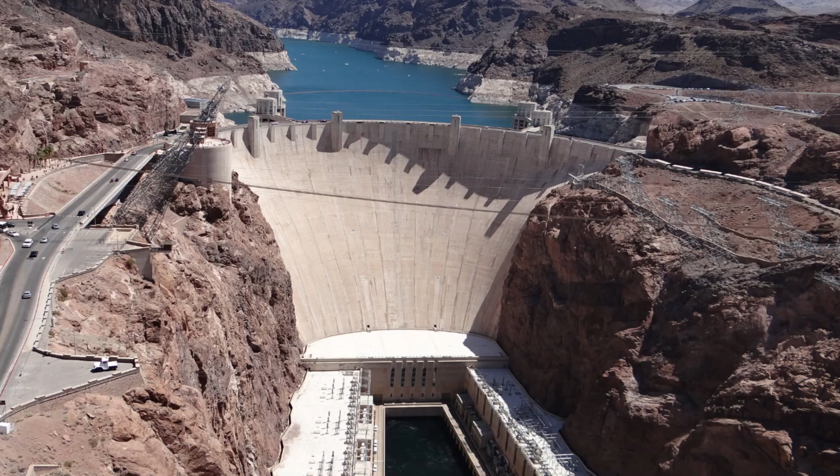Are you considering studying civil engineering? What is civil engineering? What kind of courses could you expect to take? What are the different subfields of civil engineering? What type of careers might you expect to go into? All that and more in this video.

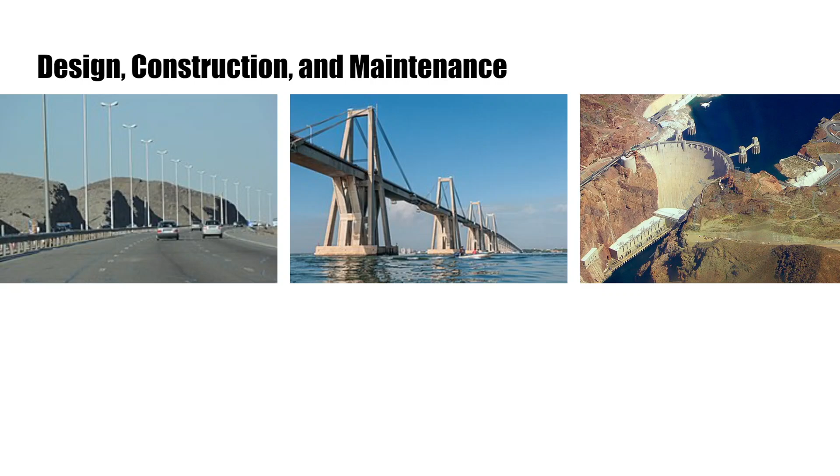Civil engineering is an engineering field focused on the design, construction, and maintenance of the physical and naturally built environment. This field covers a broad scope of projects and systems such as roads, bridges, dams, airports, sewage systems, and buildings. Civil engineering can be broadly broken up into four different concentrations.

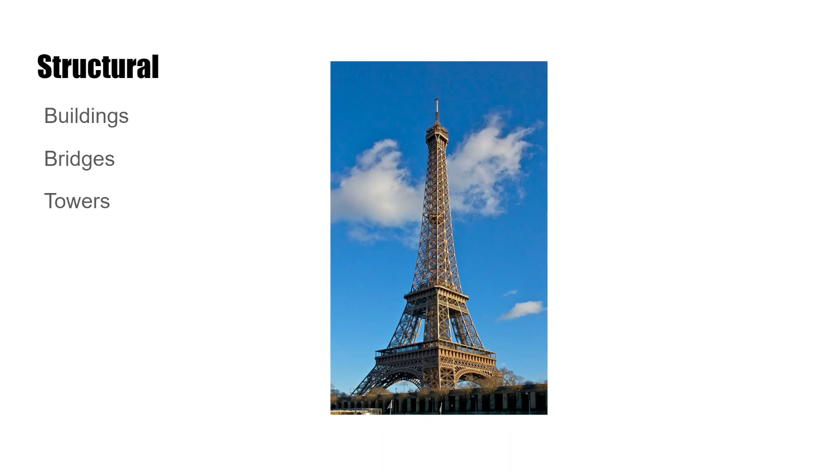Structural engineers are concerned with the design and analysis of load-bearing structures such as buildings, bridges, and towers. This field ensures that structures can withstand various forces and stresses including gravity, wind, earthquakes, and human use. They use materials efficiently and adhere to safety standards to provide stability and durability.

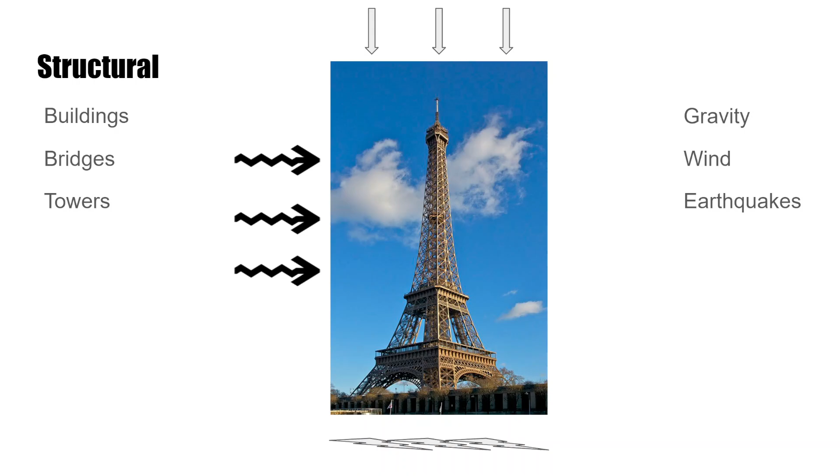They employ advanced mathematical and computational tools to model and analyze structural behavior, ensuring that designs are safe, functional, and economical.

Transportation engineers focus on planning, designing, and managing transportation systems, including roads, railways, airports, and ports. This field aims to improve the efficiency, safety, and sustainability of transport networks, addressing challenges such as traffic congestion, public

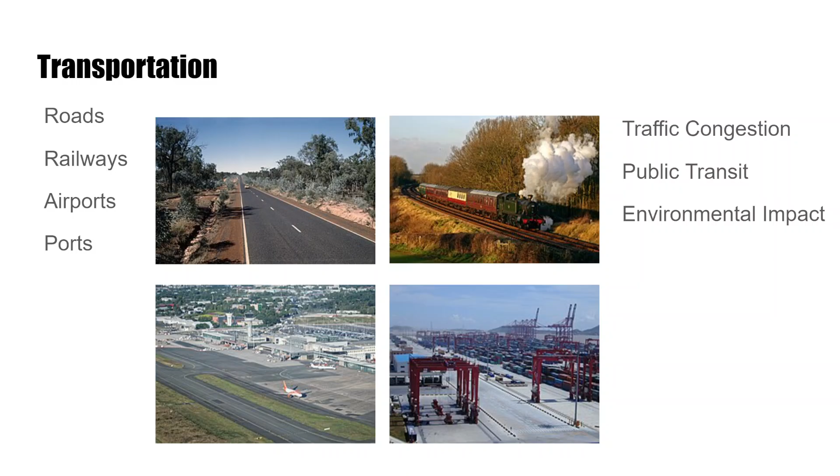transit, and environmental impact. Transportation engineers develop and implement strategies to enhance mobility, reduce travel times, and promote sustainable transportation solutions. They work on infrastructure projects, traffic management systems, and policy development to create efficient and user-friendly transport networks.

Geotechnical engineers study soil and rock behavior in relation to construction. This field involves analyzing ground conditions, designing foundations, and addressing challenges related to slope stability, earthworks, and underground structures.

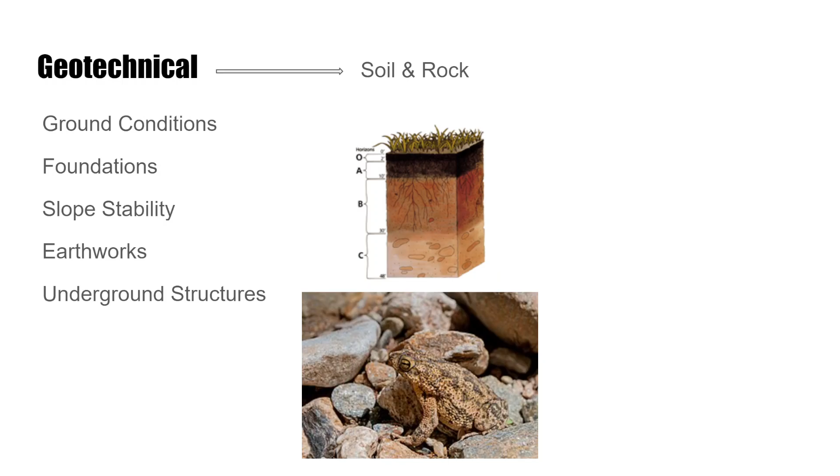Geotechnical engineers ensure that projects are built on solid and stable ground, preventing issues such as subsidence, landslides, and foundation failures. They conduct soil tests, analyze geological data, and design solutions to support safe and sustainable construction practices.

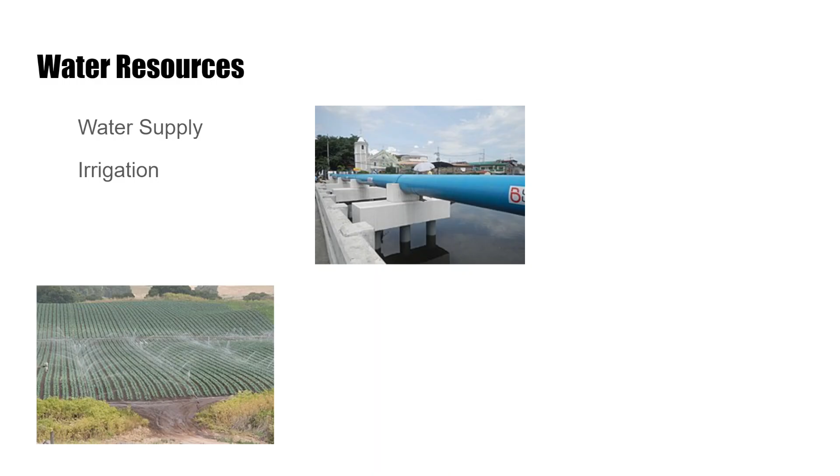Water resource engineers deal with the study and management of water resources, including designing systems for water supply, irrigation, flood control, and wastewater treatment. This field addresses the challenges of water availability, quality, and distribution, ensuring the sustainable use and protection of water resources for various human and environmental needs.

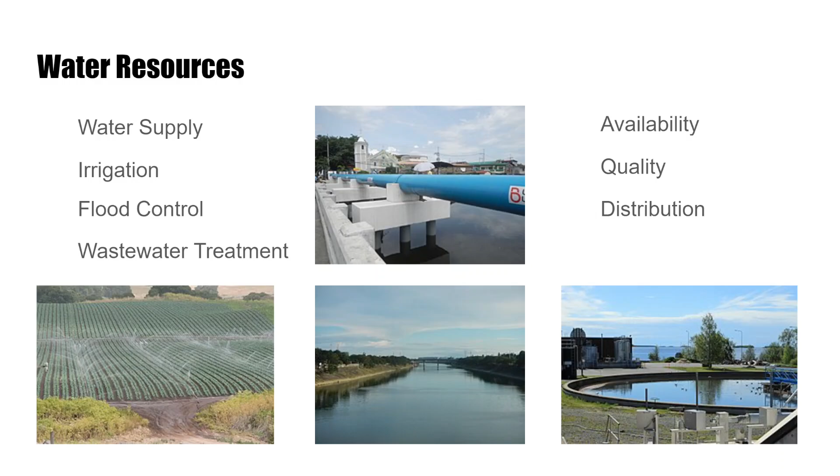Water engineers work on projects that ensure clean water supply, protect ecosystems, support agricultural and industrial water needs, and more. A typical civil engineering curriculum will include materials, structural engineering, transportation engineering, geotechnical engineering, and water resource engineering. Then on top of that, you can take additional elective courses that are more tailored towards your concentration.

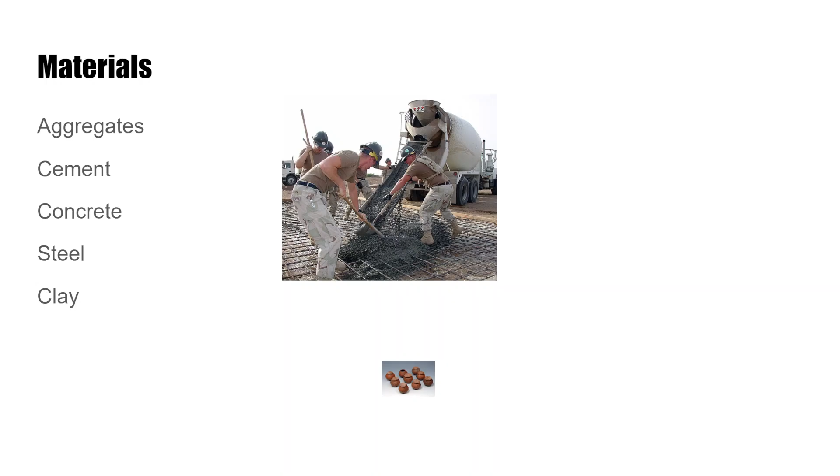You'll first start out with your materials courses, which lay the foundation for other core civil engineering courses. As the name of the course implies, you will learn about various materials such as aggregates, cement, concrete, steel, clay, wood, and asphalt. All these materials are used in a variety of civil engineering projects, but choosing the correct material

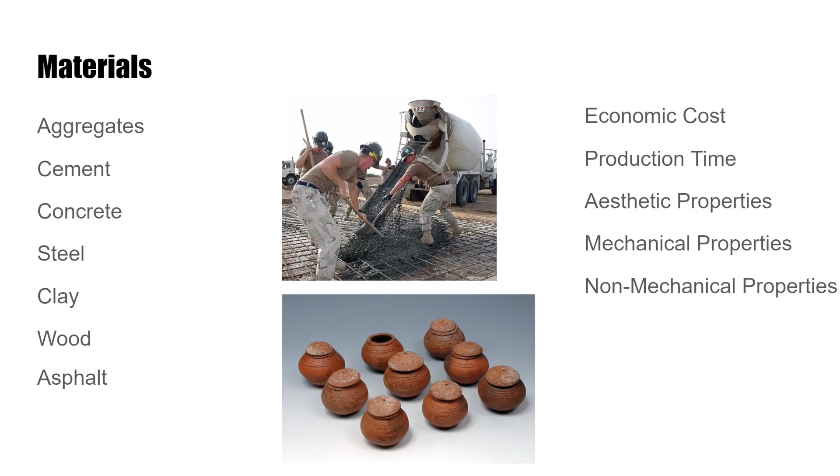for a particular project depends on a number of considerations, such as the economic cost, production time, aesthetic properties, mechanical and non-mechanical properties, all of which you will learn about in this course. One such example of an important property is the material's behavior under stress and strain, which can be determined by performing a simple tension and compression test.

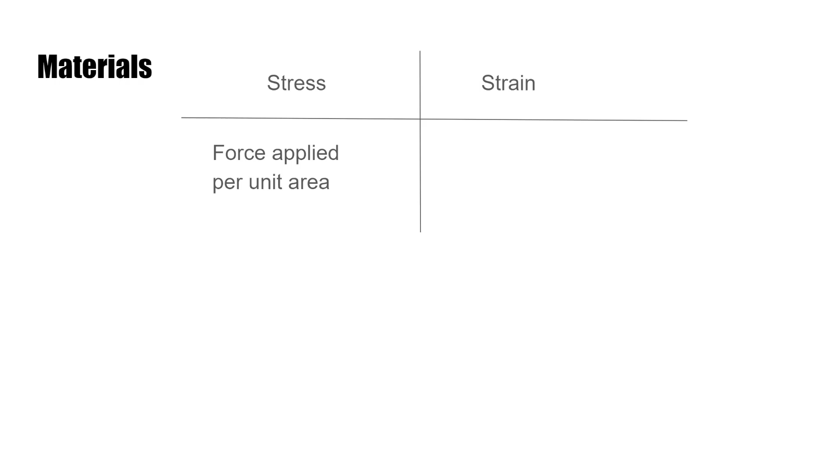A material begins to deform when a force is applied to it. Stress is the amount of force applied per unit area, while strain is the amount of deformation. The material can stretch to a certain point where it will return to its original shape when force is removed from the material, but beyond a certain point, the material will be permanently stretched.

This is important information to know about a material's property before using it in a project, as there are a number of external factors that can cause deformation, such as external load, gravity, temperature change, etc.

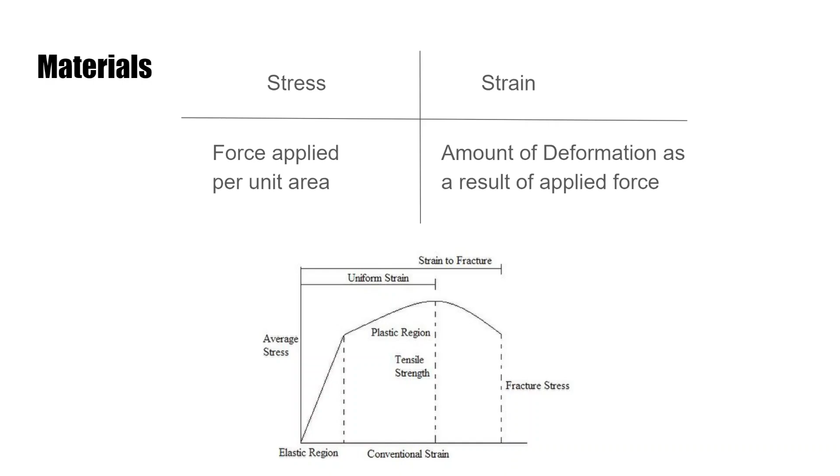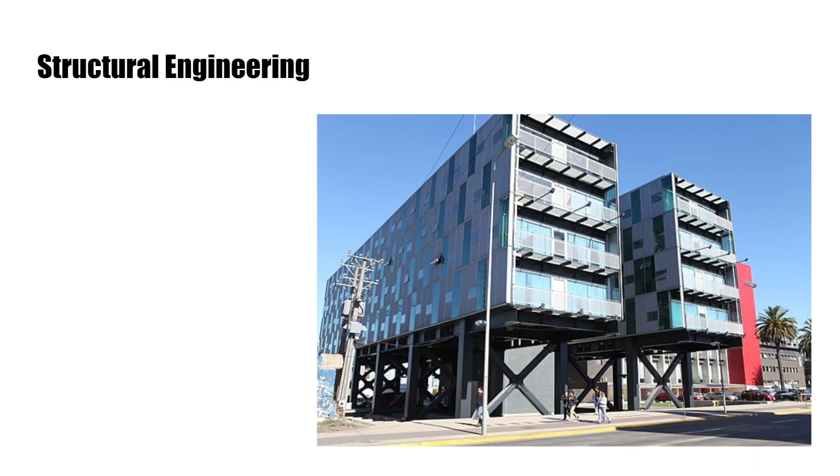Next, you'll move on to your structural engineering course. Using the information you learned in your materials courses, you will apply that knowledge to select the most optimal materials for designing structures that can withstand various forces and stresses, including gravity, wind, and earthquakes. You will also learn how to arrange these materials in various patterns and how each design influences the strength of the structure.

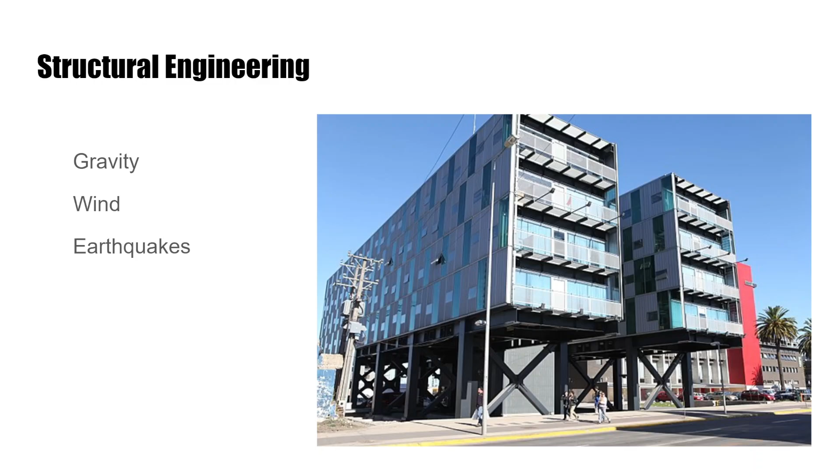Have you ever wondered why every building you look at has a square structure? What if buildings were to have a different geometric shape? Why are all buildings not triangular? Well, as it turns out, a square base can hold more weight than a triangular base, and in this class you will learn why that is the case. You will learn how to use various equations to predict the load that a structure can withhold.

What about bridges? Why do all structural beams within a bridge seem to be arranged in a triangular pattern? As it turns out, the triangular pattern, otherwise well known as a truss, is designed such that the heavy load that the bridge sustains is distributed across its various beams and columns to allow for a high strength to weight ratio. In this class, you will learn why the truss, in most cases, is the most optimal design for bridges.

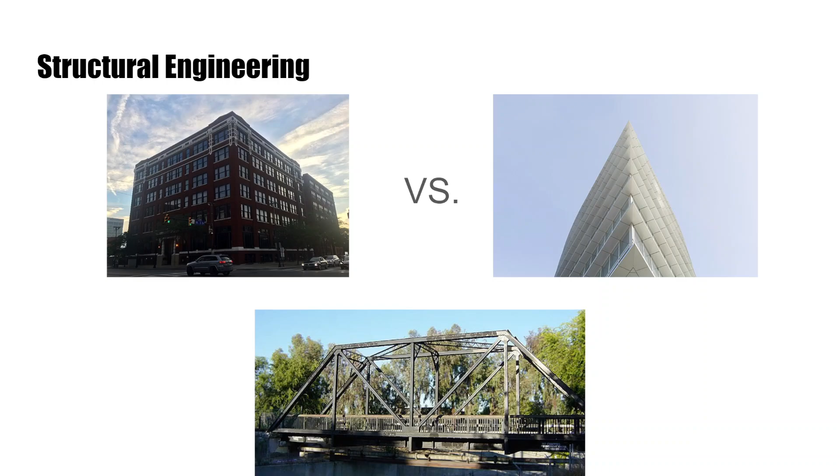Next, you'll move on to your transportation engineering course. Unlike most other disciplines within civil engineering, this course isn't concerned with processing inanimate materials into building something that we can use. Rather, transportation engineering is concerned about moving people around in a safe and convenient way. Unlike materials and structures, which have predictable and measurable properties, predicting human behavior has a lot more uncertainty.

There are social elements to human behavior that involve emotional reactions and even political decision making, which have to be taken into account. For instance, transportation engineers need to take into account the environmental impacts of various designs, as that has political implications. In this course, you will learn about all the various factors which affect how our transportation systems ought to be designed.

You will also learn about traffic engineering and how to optimize traffic flow. You will learn about different ways traffic congestion is measured, such as with flow, which is defined as the number of vehicles that pass a point on a highway during a specified time interval, or density, which is defined as the number of vehicles occupying a given length of highway. You will also learn about the various mathematical traffic models which define the relationship between these traffic parameters.

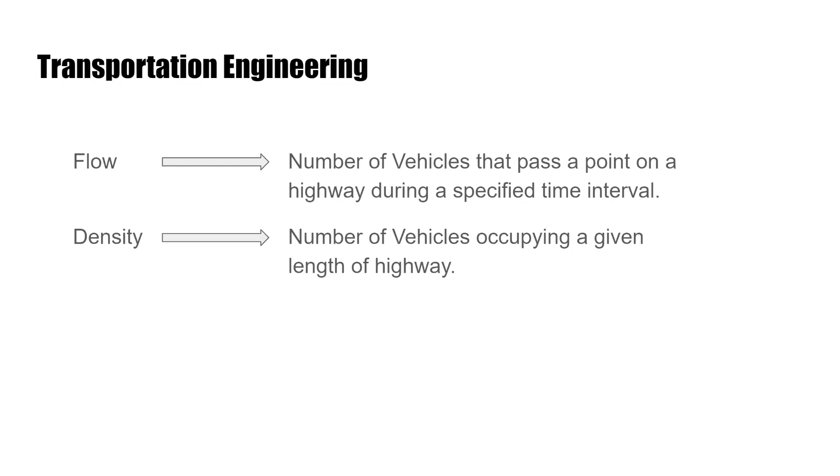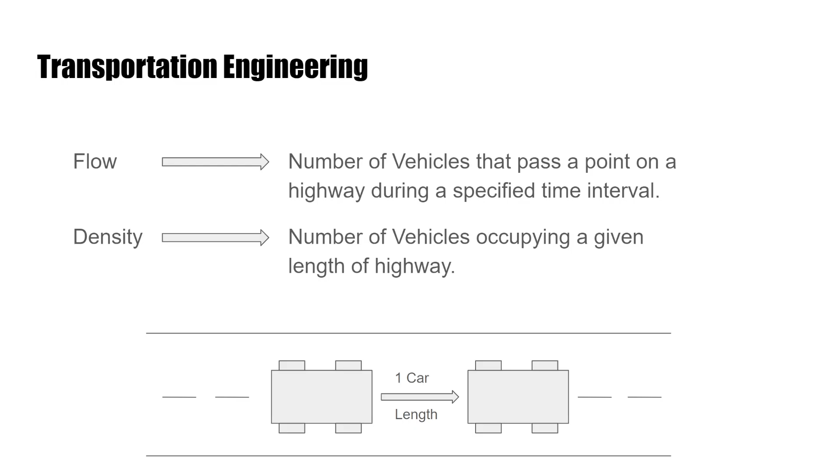For instance, how do we predict how cars will follow one another in an uninterrupted flow? One such model is to assume that a vehicle will trail another vehicle while leaving themselves the length of their car as the distance between themselves and the following car. Or what happens to these traffic parameters when an obstruction in traffic occurs, such as in the event of an accident, or when the highway narrows? You will learn about all these mathematical models and how they influence traffic parameters in this course.

Next, you'll move on to your geotechnical engineering course. Soil, the foundation on which we build modern society, is a complex material which is very variable in its grain size, cementation, strength, and behavior. A mass of soil includes accumulated solid particles and the void spaces that exist between the particles, which may be partially filled with some type of liquid or gas. The volume of soil is generally expected to include material in all three states of matter: solid, liquid, and gas.

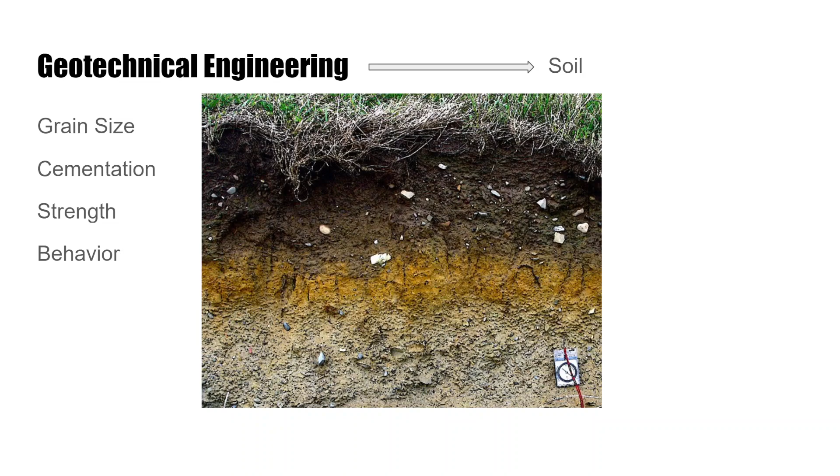The composition of soil determines many of the soil's key properties, such as its porosity, which is the ratio of the volume of void space to the volume of mass, or degree of saturation, which is defined as the ratio of volume of water in the voids to the volume of voids. In this course, you will learn about all these properties of soil and how they determine the strength of soil.

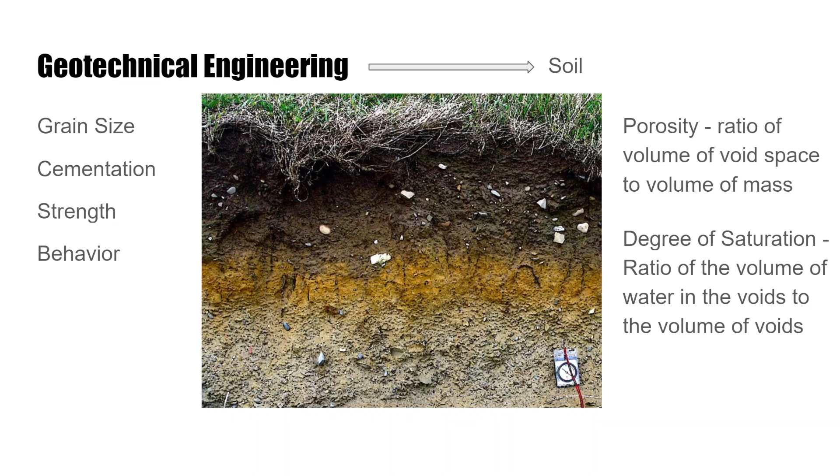When structures are placed on a foundation consisting of soil, the loads from the structure cause the soil to be stressed. Under the stress of load, air and water in the voids of the soil will be compressed out of the soil, leading to a volume decrease. To ensure the safety and stability of the structure, geotechnical engineers need to know how to analyze how much the soil is compressed. In this class, you will learn all the equations and techniques for figuring that out.

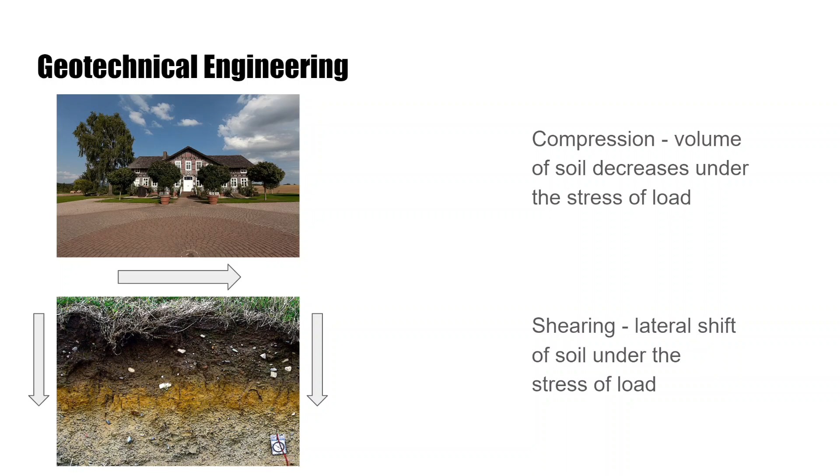You will also learn about the shearing strength of soil, which is determined by various properties of the soil, such as the resistance of its interlocking particles and frictional resistance between its individual soil grains. Knowing how much the soil will be shifted laterally, or sheared, is crucial for ensuring the safety and stability of the structure.

Then finally, you'll move on to your water resource engineering course. In this course, you will learn about the various processes and systems which provide a safe drinking water supply for human needs. This course will involve some fluid mechanics in which you will need to understand the properties of water and how it flows in a hydraulic system.

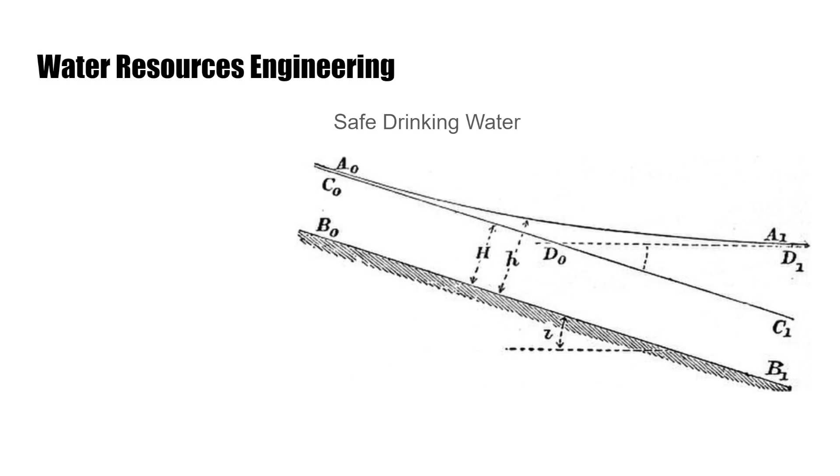For instance, the viscosity of fluid is defined as the measure of the fluid's resistance to shear or angular deformation. The elasticity of a fluid is defined as the ratio of relative change in volume due to a differential change in pressure. These are a couple of examples, but in this course you will learn about all the properties of fluids and the techniques and equations for determining their flow in a hydraulic system.

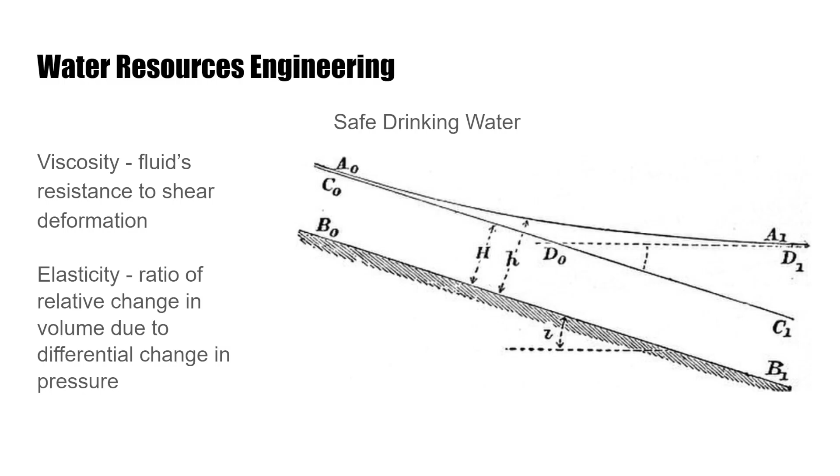You will also learn about water distribution and how to supply the users of the water network with enough water under various loading conditions. A loading condition is defined as a time pattern of demands. The users of the water distribution network will have varying demands based on a number of factors. If there is an active fire in the city, the demand for water will be much greater than normal, or perhaps in the event of a pipe in the network being broken, people will need more water during these events.

You will learn about all the components of a water distribution network, such as the pumping station, distribution storage, and distribution piping. There are a variety of other topics which you will also cover in this course, including, but not limited to, flood control, hydroelectric generation, stormwater control, and water sustainability.

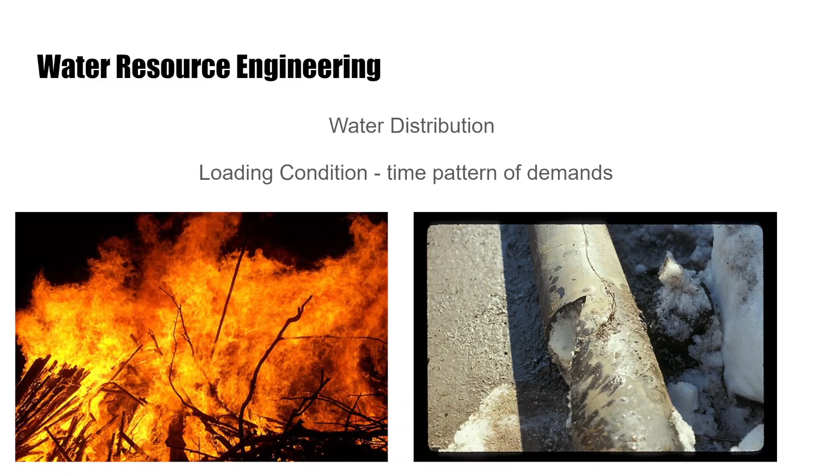This covers all the core coursework you'll see in a typical civil engineering curriculum. Once you have completed all your core coursework, you'll have the option of taking additional elective courses. Some of these options may include structural dynamics, traffic engineering, intelligent transportation systems, railway engineering, hydraulic systems, civil projects, and much more. I hope this video has helped you understand what you can expect to study while pursuing a degree in civil engineering and the types of careers you can expect to go into.